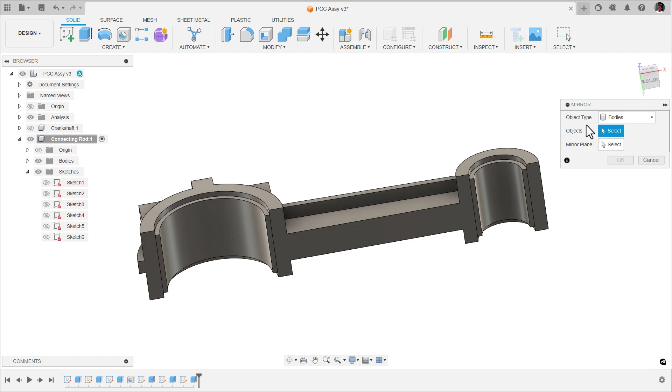Awesome, we want this extrude cut feature to be mirrored onto the other side. So we have created pocket here. I want this same feature to be mirrored onto the other side. So in the create, select mirror. And here in the dialog box, object type, change it to features.

So the feature is the last one that we have created, and the mirror plane be XZ plane again. So make sure the preview looks good and say OK. Now you have that mirror on the other side.

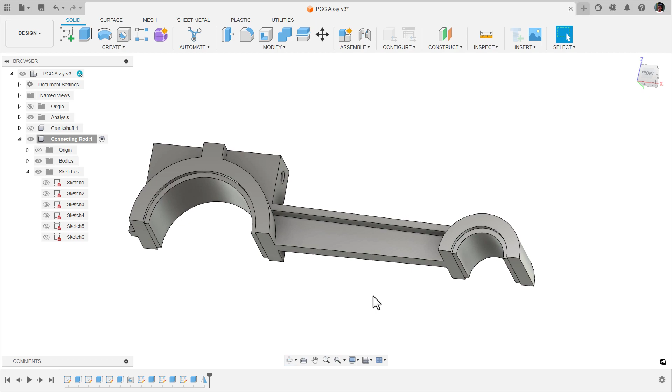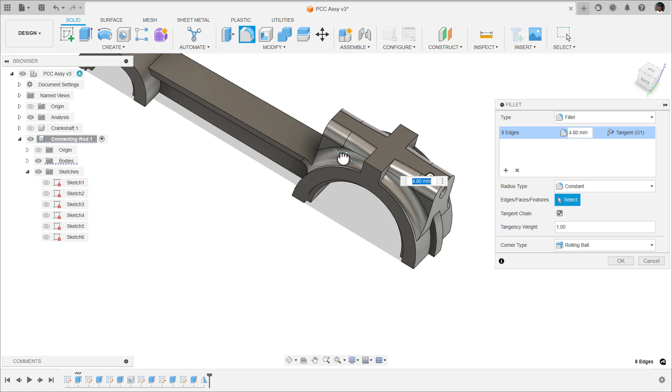Let us do a couple of fillets now. Select the edges. Make sure you select the bigger edges so that these are major fillet that we are going to provide. It is about 5 millimeters. Okay, fine.

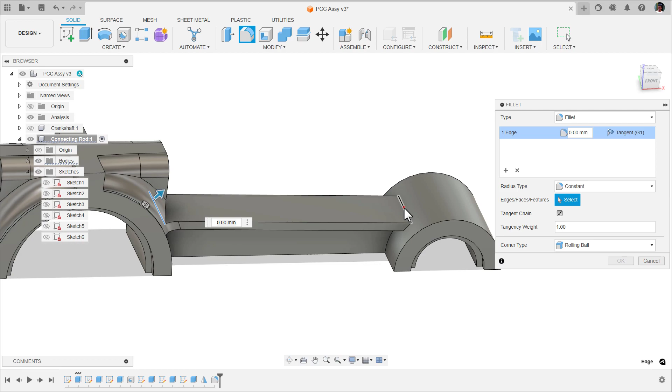Again, repeat the fillet. So, check this edge, and I'm going to pick this edge again and let the radius be 10 millimeters. Let's change that to 8 millimeters. Because we will be getting this bolt head here, it should not overlap with that fillet. Say OK, again, repeat the fillet.

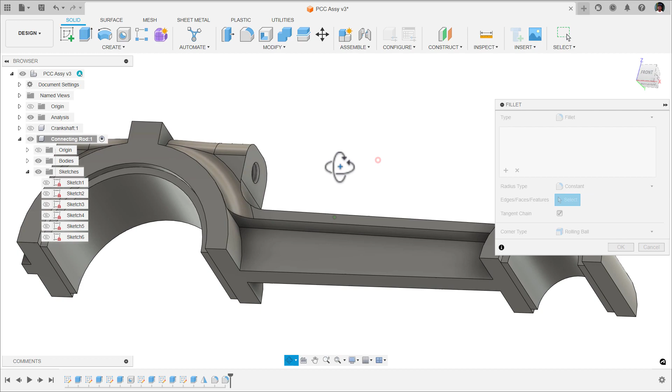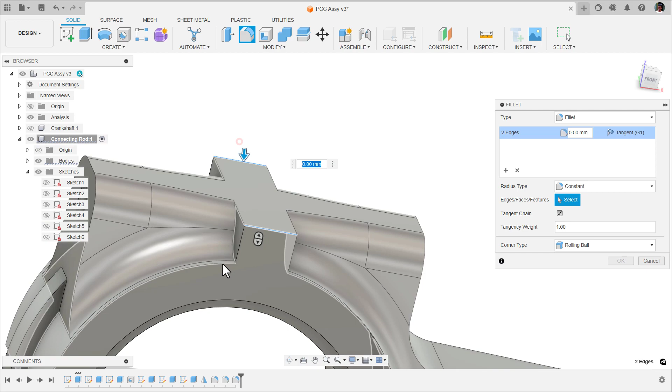And select these edges also. The fillet radius be 3 millimeters. Say OK. Again, repeat the fillet. It is a smaller fillet that we need to provide for these edges. Let the fillet radius be 1 millimeter.

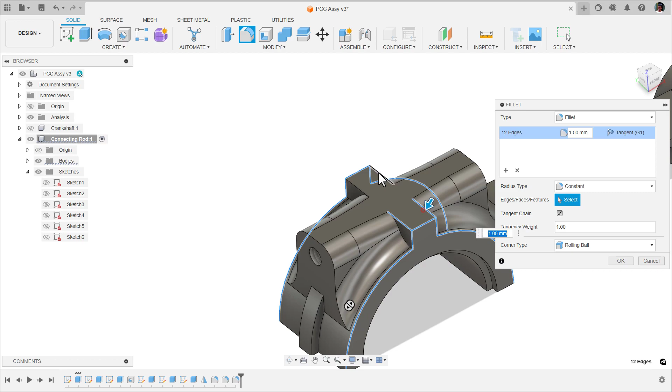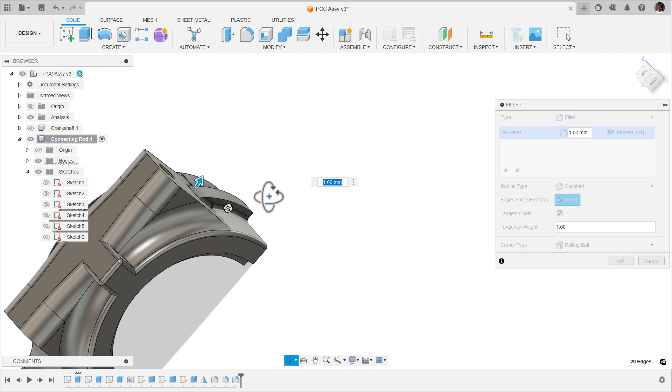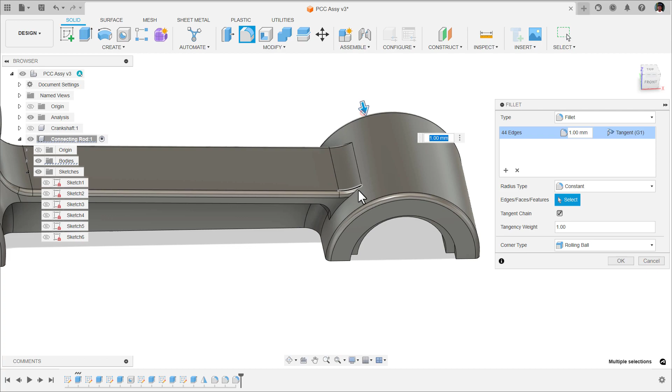You just carefully select the edges. Yes, awesome. So almost all the edges are selected. One more edge over here. And one edge on the other side. Yes, awesome. Say OK. So now we are done with the fillet.

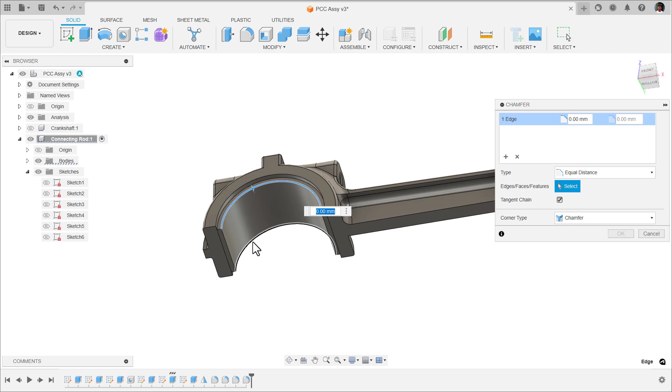We need to provide chamfer for the bearing and bush. So modify, chamfer, select this edge. And this edge also. Let the chamfer distance be 1.8 millimeters, because I want it to be tapered all the way along. So that is the offset distance that we have given, right? Say OK.

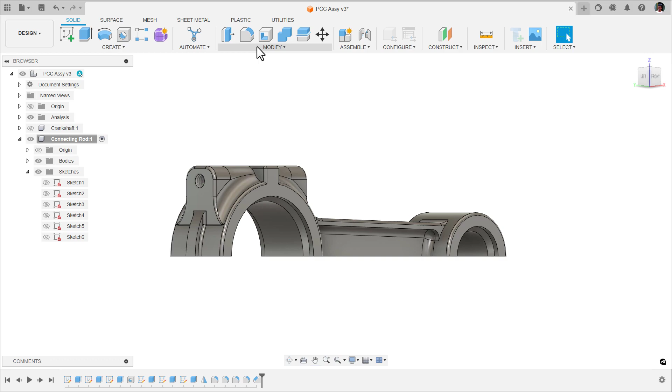Let's split. So split. And split this one also, because we want it to divide, right, so then only we will be able to assemble it with the crankshaft. Saying OK. So now the bodies got split. Awesome.

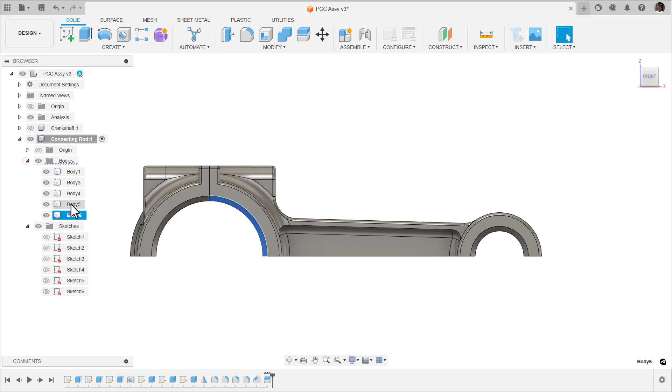Let's insert bolt now. So make sure you are online. You go to Insert. You have option called McMaster-Carr component. Search for 91280A429. Then you got one option, just click on that. And here you have a product detail. Next to product details, switch to 3D STEP and click on download.

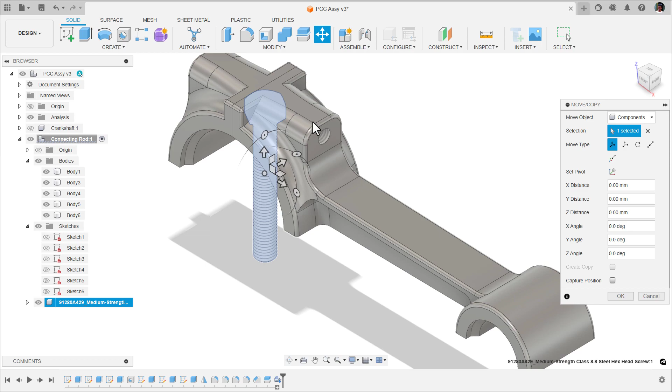So you will get that bolt over here, so actually, let us orient it. Capture the position, make sure you check this and say okay, so now we need to assemble it. So, select Joint. Home View. Just pick this center point. So, if you place the cursor over here, you got the points, right? So, I have to select the center point. But when I come to center point, the points are gone.

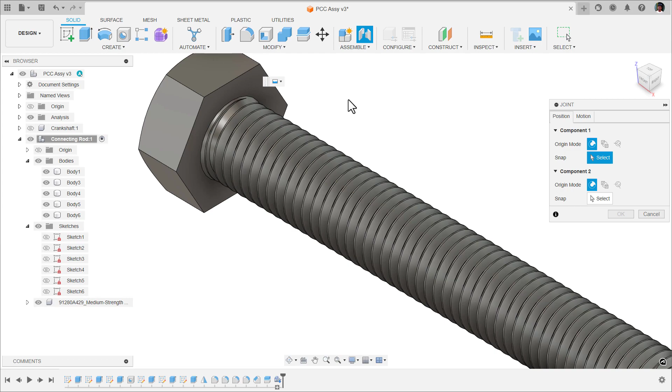So, to lock it, just hold Control on your keyboard. This is particularly important. Just hold Control then. If you leave the place, the points will still be there. Okay, just practice that. And then you will be able to select the center point of that face. And from here we have to select this point. And the motion, make sure it is rigid. Play the animation to ensure that it is rigid and say okay.

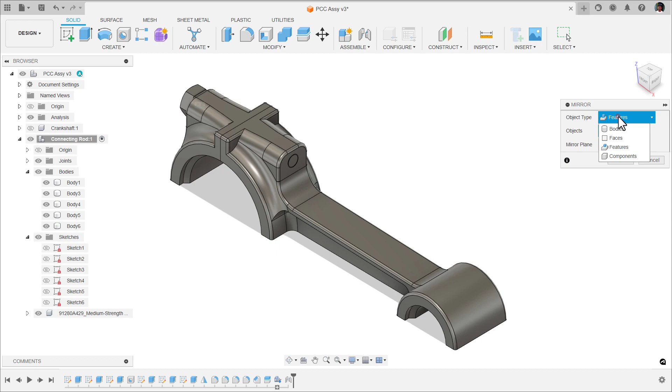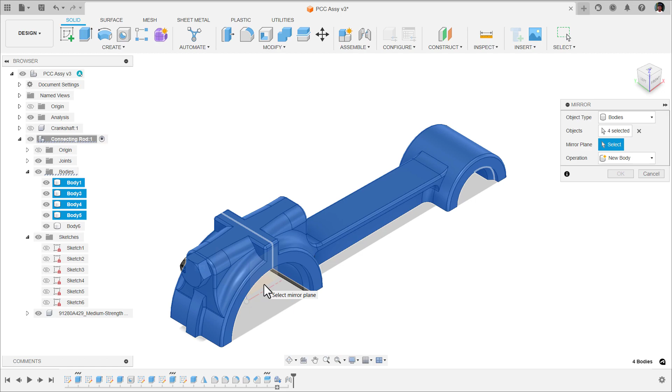Awesome. So we are almost done, we just have to mirror the parts. Create Mirror. And instead of features, I'll switch to bodies and select all the bodies, excluding the bolt. But we will mirror the bolt later because we are going to use join now. To mirror, I'm going to select the XY plane, so I was unable to select it. So just tilt it away and make sure you pick the proper plane.

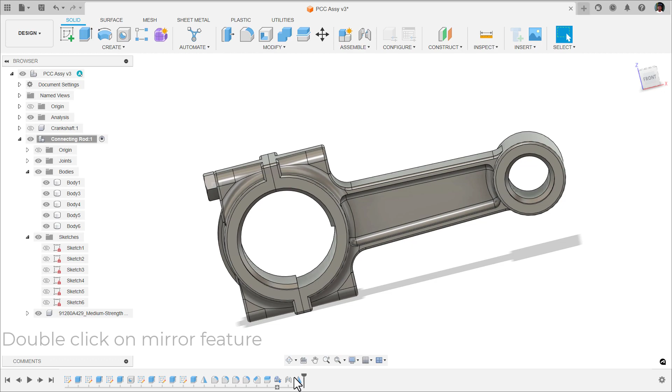And see, we did not get this body over here. That is because we did not select it. So just edit the mirror feature and make sure in the objects you just hold Control and add this body too. Join. Okay, so now we got it perfect.

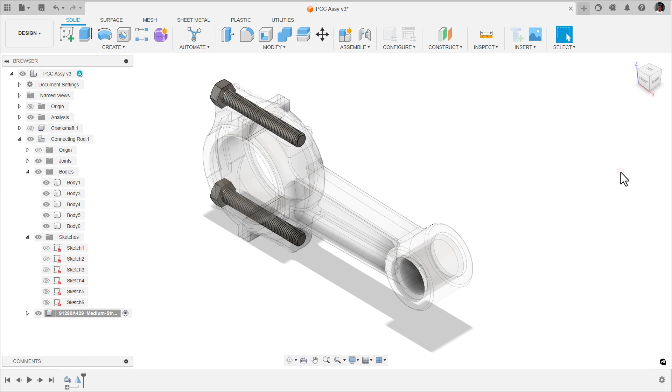Activate this one and do the mirror now. Okay, bodies, select this one and we are using the same, that is XY. So, if you are unable to select, pick that, hold it, and you will get options XY. So now it is good. It should be new body. Activate the top level connecting rod. Ensure that it is good. So now you can rename your bodies.

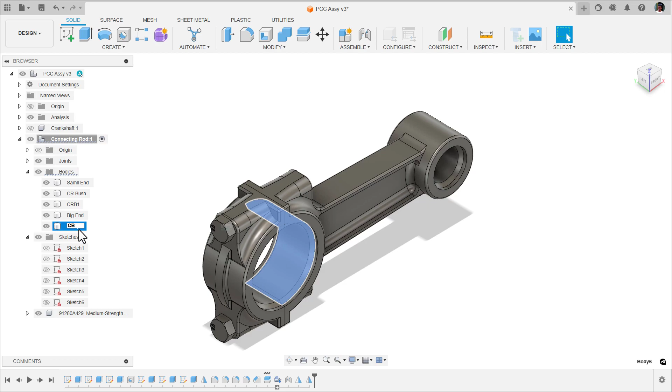This is big end. And this is connecting rod bush. This is connecting rod bearing. Yeah, I'm going to rename it as CR bearing, in short CRB. This is small end. Sorry, this is actually small end, right? This is big end. And this is CRB2. Fine, we just renamed all the components and oops, typo error. Let it be small end.

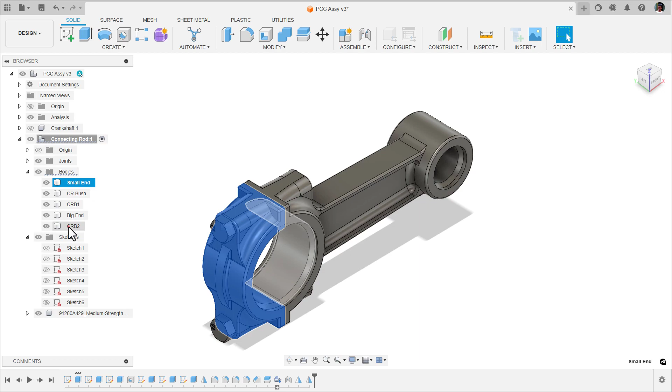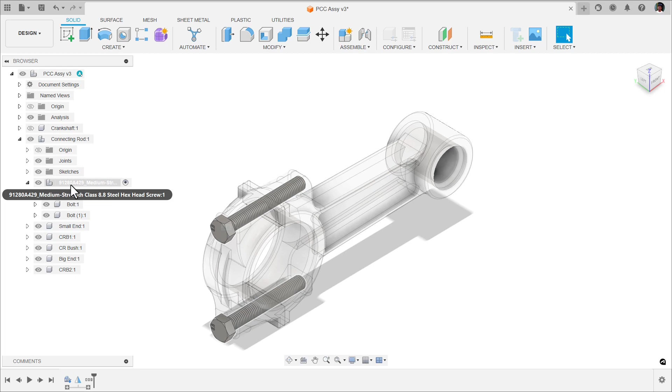Hold Shift and select all the components. Right-click and create components from bodies. Okay, so again here also for bolts, I just want them to be components because we will be using them in the assembly later. So let their name be bolt. So it will automatically rename another bolt. Right-click and select Create Components from Bodies. So remember that these two bolts are created within this entire section. Okay, so now activate the top level.

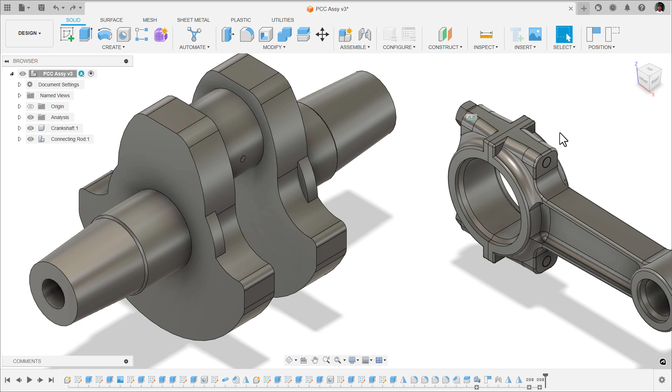You can see that our connecting rod is created, so if you show the crankshaft, it is actually overlapping, but that is fine. In assembly, we will do the corrections or else you just drag it. Okay, but it is entirely coming out. So now you can drag it. All will come and just capture the position. This is all for part 7.

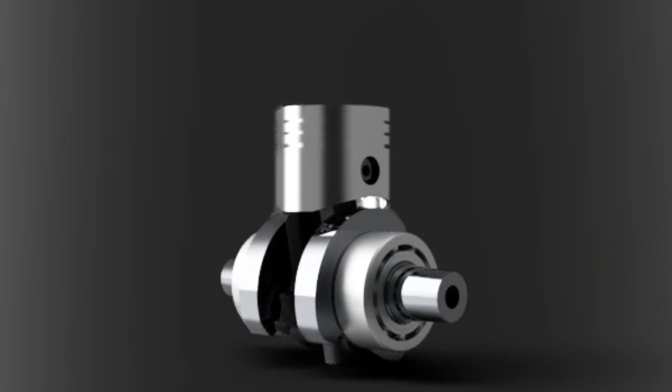With this, you have successfully completed connecting rod. In the part 8, we will model piston.